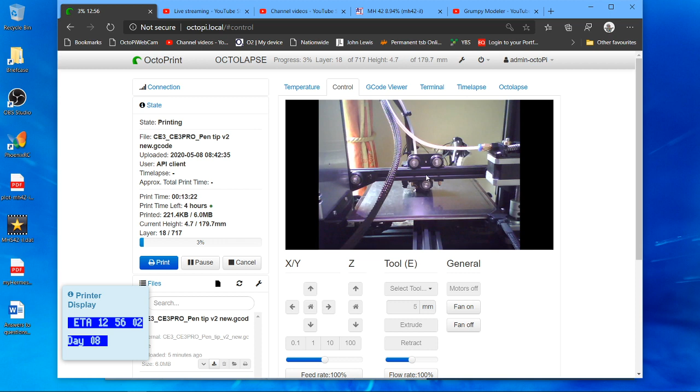Pylon racer that the Grumpy Modeler made. My son sent me a link to the Grumpy Modeler's Pylon racer, and it looks pretty good, and it certainly is very fast.

So printing has commenced. This is the nose cone. All the settings are usually the same, I'm doing single wall printing. This is going to be the glider, so I'm not going to actually print it. I've already got a sort of pylon racer from 3D Labs, the Joker, which I've completed, and so I'm going to keep that as the pylon racer for now.

Which is a bigger wing. In fact, there's two versions of this glider - well, in fact, three, come to think of it. If we have a look at the files, you'll see why.

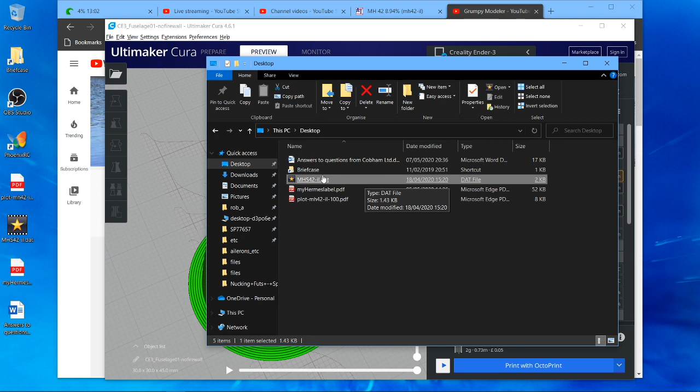So he's done a good job. He's made it free - this is completely free, it's under Creative Commons, and it's well designed. That's the main thing. So once you've downloaded it, you've got a collection of files.

If you've got a large format printer, then there's large format sections for very tall printers. I'm using the standard because I'm using an Ender 3 Pro. There's a glider fuselage.

So you'll see there's different types - there's a glider one, there's a larger printer one, there's a larger printer one with external motor, larger print with no firewall. So there's all different flavors.

There's even one that includes a Cox 49 nitro type motor. Somebody's done a conversion for that as well.

And then there's a standard fuselage - that's a standard fuselage for a regular printer. There's different versions, so it's fairly self-explanatory.

It's also got wing latches, which is good, so you can pop the wing on and off - definitely something 3D Labs have only just started to get into, the concept of having a wing you can pop on and pop off. It's included a latch for it.

There's a glider nose, so I'm going for the glider. I just want to see how it handles, and I'm going to go for the larger wing. So there's a larger wing as well - you'll see different wing sections.

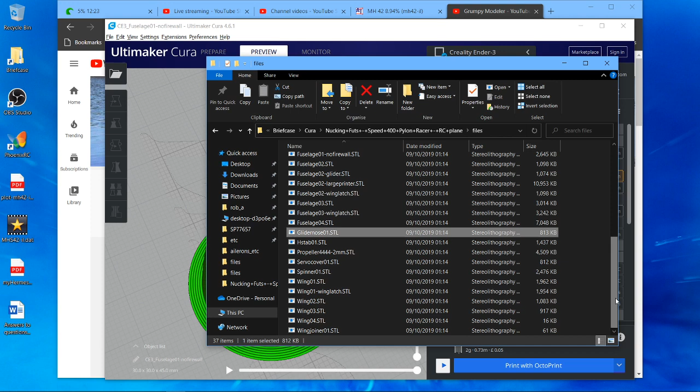And yeah, so that's the one I'm going to print. So that's your source files. Then it's just a matter of doing the usual slicing, so depending on - my previous videos cover all of the settings for thin wall printing, which really have been perfected since learning how to print 3D Labs wing sections and fuselage and the like.

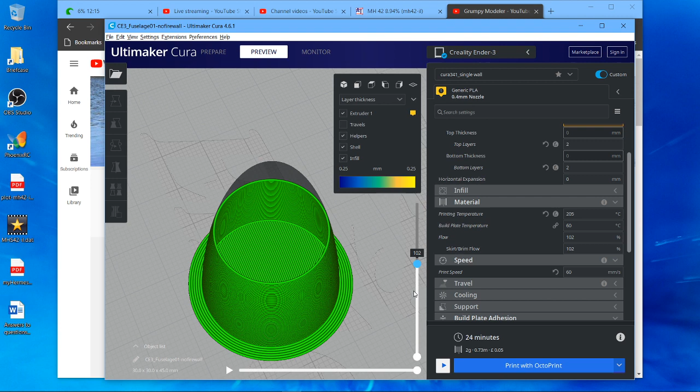Yes, this nose has just got a couple of bottom layers, so it'll weld onto the fuselage section. If I just undo that, come back to the fuselage section I'm now printing. Oops, let's just drag that back in position.

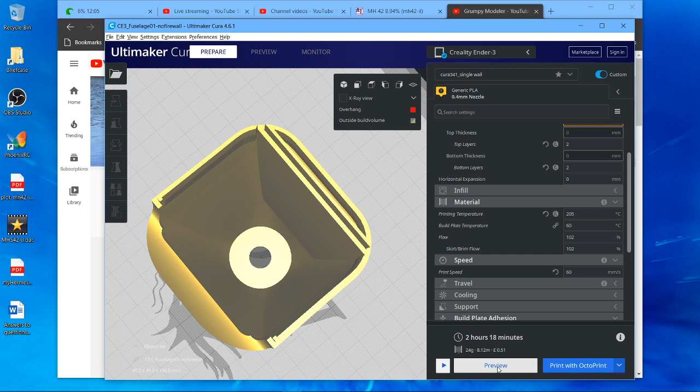So this one I'm going to include two top and bottom layers, and that's because if we slice this up, we want that to be filled in a little bit so we can bond onto it. Doesn't need to be overly thick because we're not going to mount a motor into it, so I've just got a couple of top layers to thicken up the pegs effectively at the top.

This is the dovetail section that other people are starting to use now, which makes it much easier to glue these sections together. And then at the very bottom, if we just zoom in down there, you can see I've got a couple of layers just to fill in the bottom section.

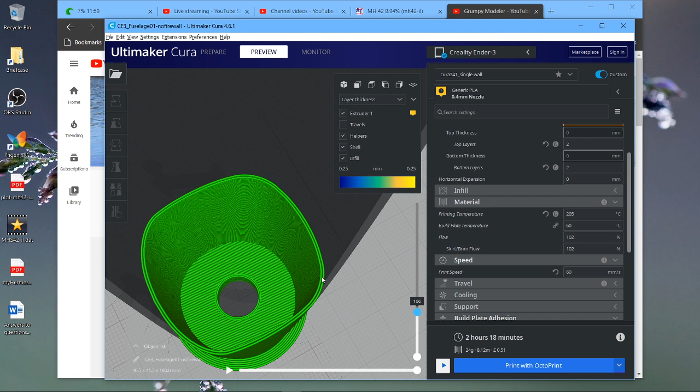He's using two walls effectively - so although it's single wall, he's actually put two walls in for strength and a floor, you can see here, to give it additional rigidity for landing as well. So well thought out design, straightforward, just a box section really.

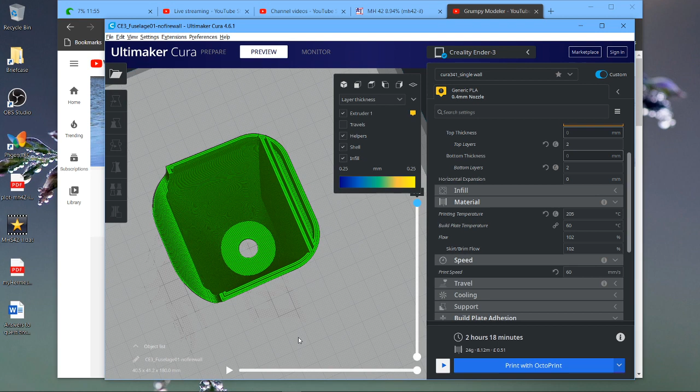But pretty tidy. So anyway, that's my next project, and I'll get this posted up shortly. Catch you later.